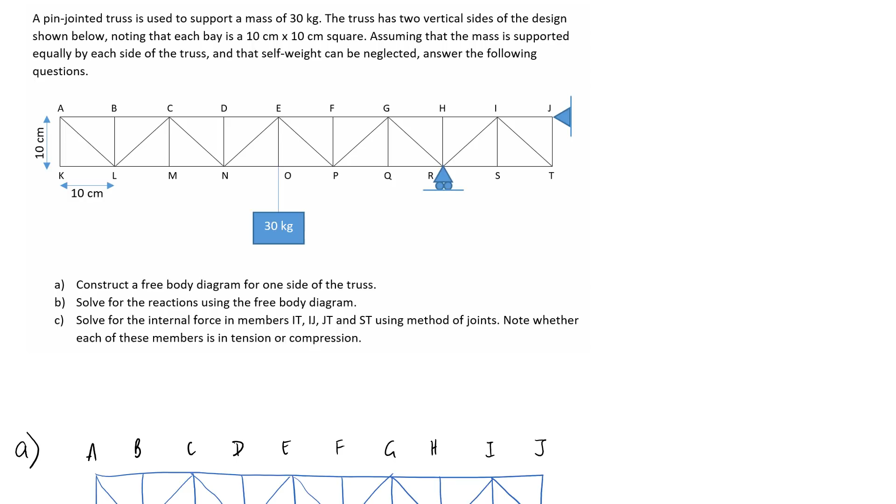So assuming that the mass is supported equally by each side of the truss and that self-weight can be neglected, we need to answer the following questions. So the first one is that we need to construct a free body diagram for one side of the truss. So of course a free body diagram is just a diagram that shows the forces acting on a particular body. So if we scroll down a little bit, I've drawn in the basics of what our body, which is the truss, actually looks like. So onto this we need to add on the forces.

So the most obvious force, I think, is this first one here that I'm going to consider, which comes from the weight that's hanging off the truss. So at the moment, this is given as a mass of 30 kilograms, and that's the total applied to both sides of the truss. So if we're just drawing the free body diagram for one side, then each side's going to take half of that, so 15 kilograms.

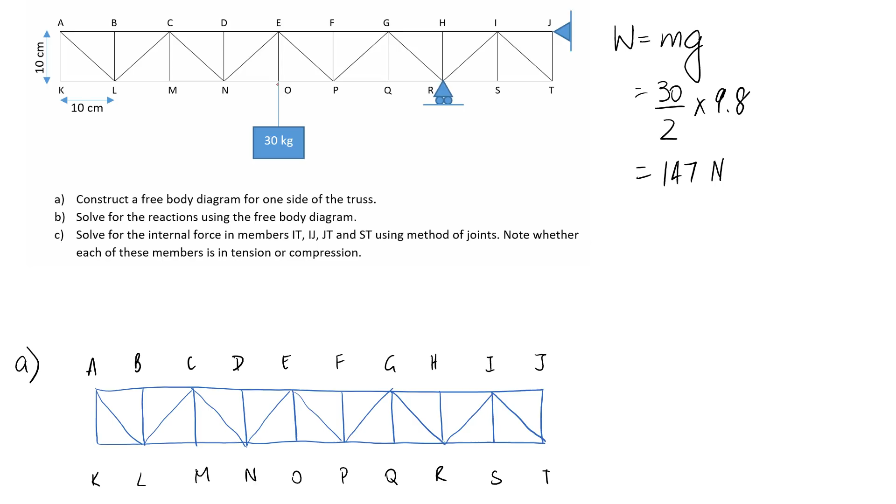Now we can calculate that as a weight using our equation where weight is equal to mass times gravity. So I'm going to write this as 30 divided by 2, multiplied by the 9.8 meters per second squared for acceleration due to gravity. So this ends up working out as 147, and the units are going to be in newtons. So when I mark it on my diagram, it's acting at this point O on my truss, and we know that it's going to be acting downwards because that's the way that gravity operates. So my first force is 147.

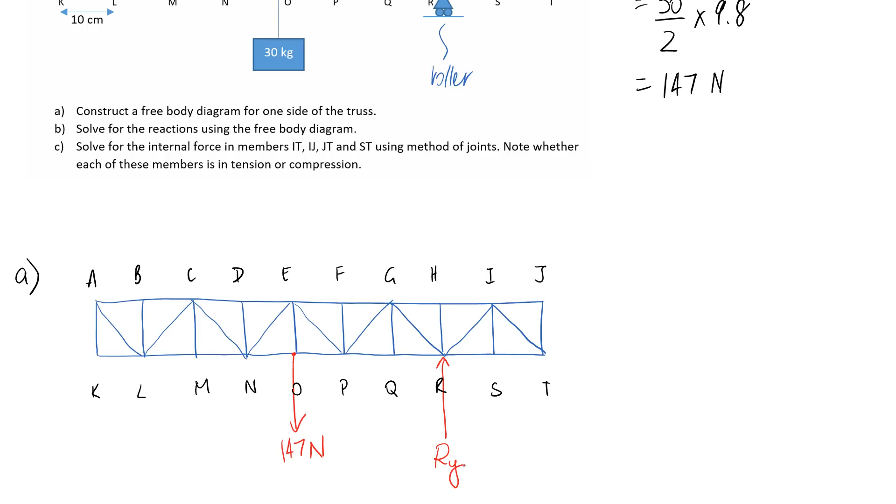Alright, so looking back up here, we're going to get a couple of other forces coming from the supports. So these are the things that are holding our truss up or connecting it to the ground. So let's think about this one first. This is a roller support because it's got the little wheels on it. So we know that roller supports are only going to provide one reaction, and that happens perpendicular to the contacting surface. So we can see the surface here is horizontal, which means that the reaction will be vertical. So I'm going to take a stab as to which direction, as in either upwards or downwards, this is operating in. And it's acting at point R. I'm going to guess it's going up, but we'll see in the calculations whether that was correct. And I'm going to call it RY.

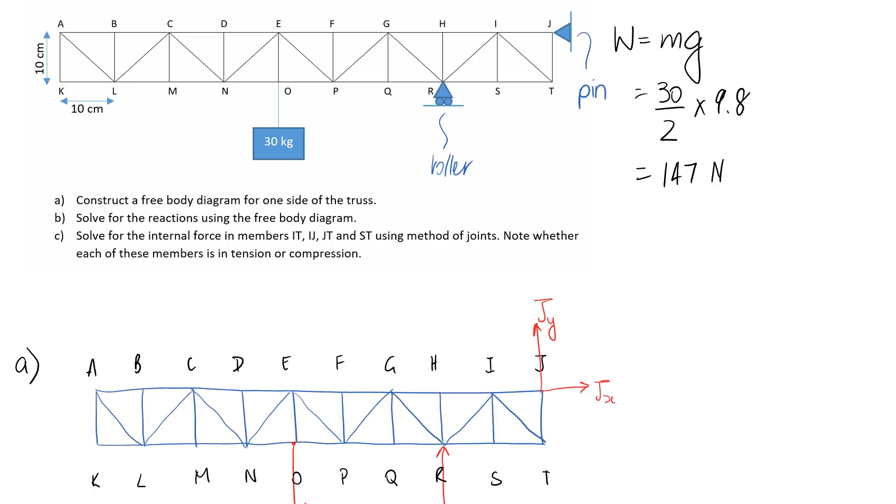So the other support we had here is a pin support. And we know that pins have a horizontal and a vertical reaction that they can provide. So that's over here at point J. I'm going to guess that the horizontal part is going to the right, and I'll guess that the vertical part is going upwards. So I'm calling them JX and JY. That there is pretty much my complete free body diagram, because we're told to neglect the self-weight of our truss. So that means that there's nothing else that's really acting upon it. No wind load we're told about or anything else. So that's part A complete.

So we'll jump on to part B, which is now to solve for the reactions using our free body diagram. So that means we need to figure out RY, JX, and JY. Now, if we're assuming, which we are going to, that our truss is in equilibrium, so it's not moving, we have three equations that we can use. So sum of forces in the x direction has to be 0, sum of forces in the y direction has to be 0, and sum of moments at any point that you pick have to be equal to 0. So we have three equations and we have three unknowns, which means we should be able to solve all of them.

So I'm going to start off by selecting the sum of moments equation, and we need to pick a point to consider this about, and I'm going to pick point J, which was where the pin joint sat. So the reason is, if I pick that point, JY and JX are not going to appear in the equation, so I should only end up with one unknown, which is RY, which I can solve directly. If I pick another point, what typically will happen is I will end up with more than one unknown in the equation, and then I'll have to use simultaneous equations and substitution to be able to figure them all out. So I'm going to start with summing moments at the pin joint.

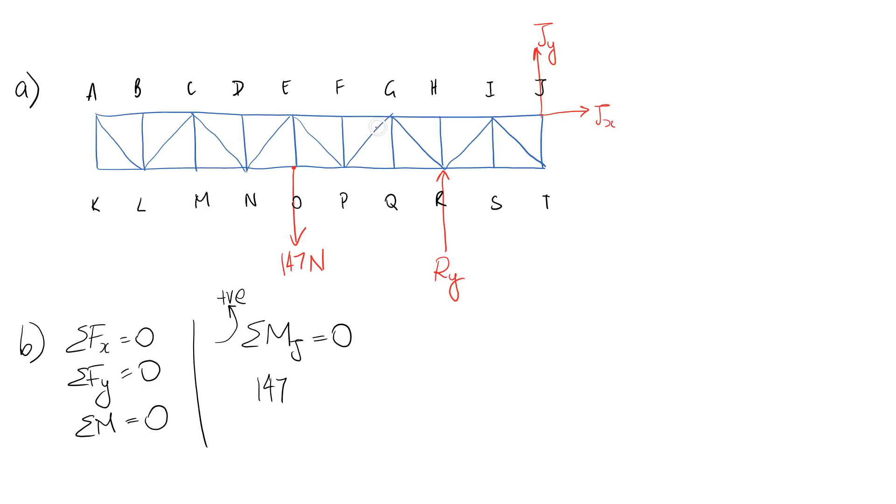So in this case, my line of action operates straight through this point E, and the perpendicular distance is going to align with the length of the top of the truss here. So I can see that this is going to include 1, 2, 3, 4, 5 bays, and we were told back up here that each bay was 10 centimeters. So that means there's going to be 50 centimeters in terms of the distance from the line of action back to our point of interest. I'm going to do it in meters, our base units, so I'll mark it in as the equivalent of 0.5 meters.

So down here, to calculate my moment, it's the force multiplied by that distance, and then the last thing I need to think about is the direction that it's going to push around our point of interest. So this force looks like it's going to try and rotate our truss in an anti-clockwise direction about point J, and we're saying anti-clockwise is the positive direction, so it goes positive into the equation.

Alright, so let's consider the next force, which is Ry. So that's its size. We need to solve for that in a moment. We now need to multiply it by the distance from its line of action all the way back to the point of interest. We can see that that's 2 bays, which is 20 centimeters or 0.2 in meters, so that we get base units out. So I'm going to pop that in here. And then thinking about the direction, this is going to try and rotate us in the clockwise direction about point J, so it's going to go in as a negative.

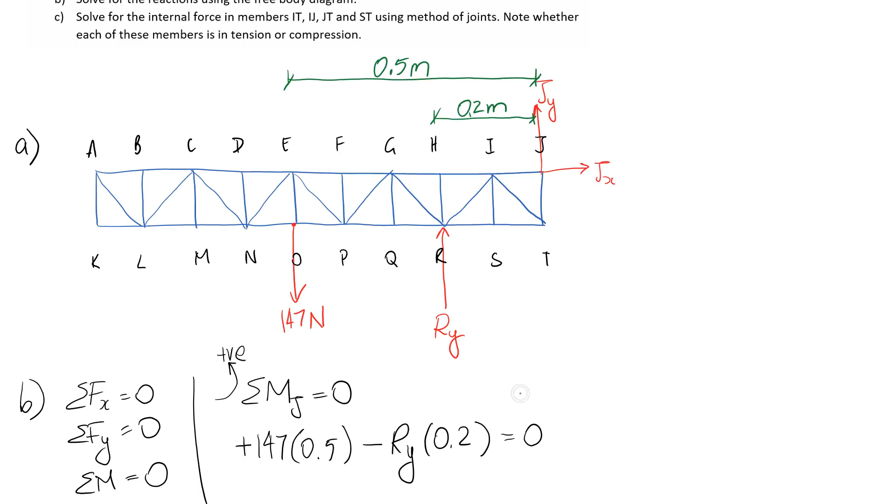Oh, and I should have mentioned, we've got 2 other forces on this diagram, but both of them are acting directly through point J. So that means that their distance back to our point of interest is going to be 0. So you could, if you wanted, put in here Jy times 0 plus Jx times 0, but you can see that they're going to just drop out.

All right, so now I should be able to rearrange directly for Ry. So I'm going to leave the 147 and the 0.5 on the left, and I'm going to shift this to the right-hand side, which means that the sign is going to switch over. So it goes from negative to positive. And then if I want Ry on its own, I'm going to need to divide by 0.2. So 147 times 0.5 divided by 0.2 is going to give me the answer for this reaction force. And it comes to 367.5, and the units are going to be newtons since we did everything in base.

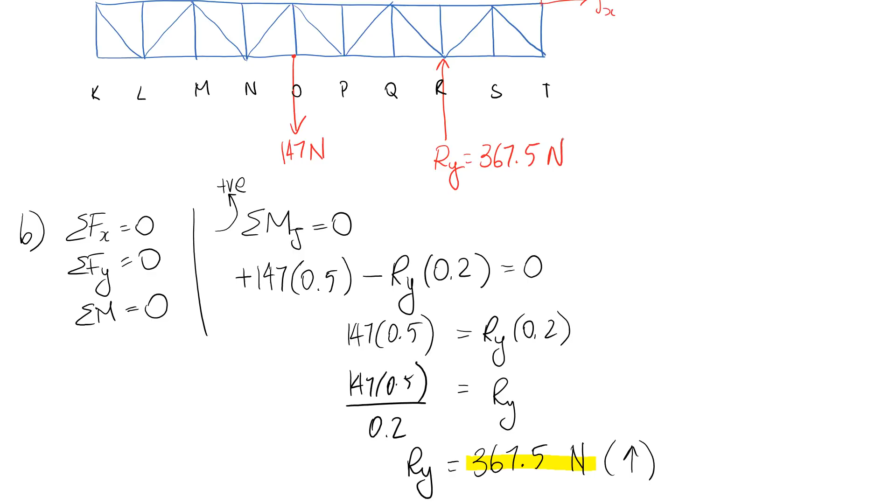So I'm going to highlight that. And I should mention as well, it's come out positive, which means that we had the direction correct up here on the diagram. So we initially guessed that it was going upwards. So I'll mark that over here. We were correct in that it was going up. So this is 367.5.

All right, so we have 2 other forces that we need to figure out, and we have 2 other equations that we can draw upon. So I might go next with sum of forces in the x direction has to be equal to 0. So if we look at our diagram, the only thing that's happening in the x direction is Jx. We don't have any other applied forces going in this direction. So this one's pretty easy. If we substitute in, we're going to get Jx must be equal to 0 in order for the forces to be balanced in that direction. So I'll pop in here, that one solved for.

And then the last one we're going to get from our last equation, which is sum of forces in the y direction has to be 0. So we do have a few things happening in that direction, so let's substitute them in. So 147 is going downwards, so I'm going to put it in as negative. We've got this 367.5 going upwards, so it's going in as positive. And then I've got Jy going upwards, so I'm going to put it in as positive as well. So we need to rearrange this for Jy on its own. So I'm going to flick both of these terms to the other side, remembering that that means the signs are going to change over. So if we put 147 minus 367.5 in a calculator, this comes to negative 220.5.

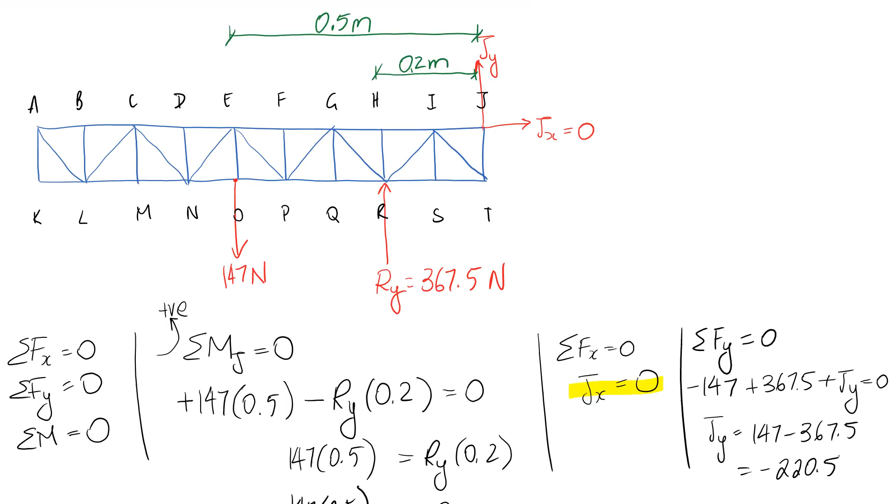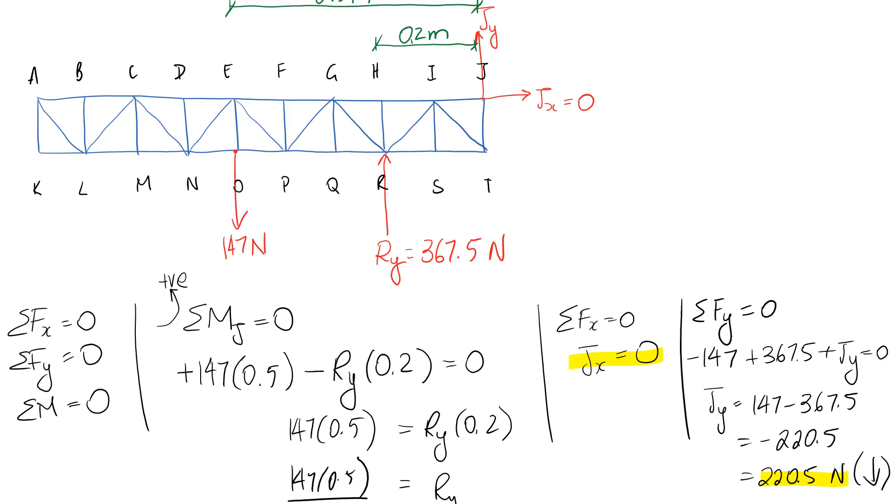So it's come out as a negative value, which tells us that we guessed the direction incorrectly. So we guessed that Jy was going up initially, but what this is telling us is that it's going to actually be 220.5 newtons going the other way, which is downwards. So that would be our answer for this last reaction force. So I'm going to make sure that it's correct up here on my diagram. So this is our conclusion for it.

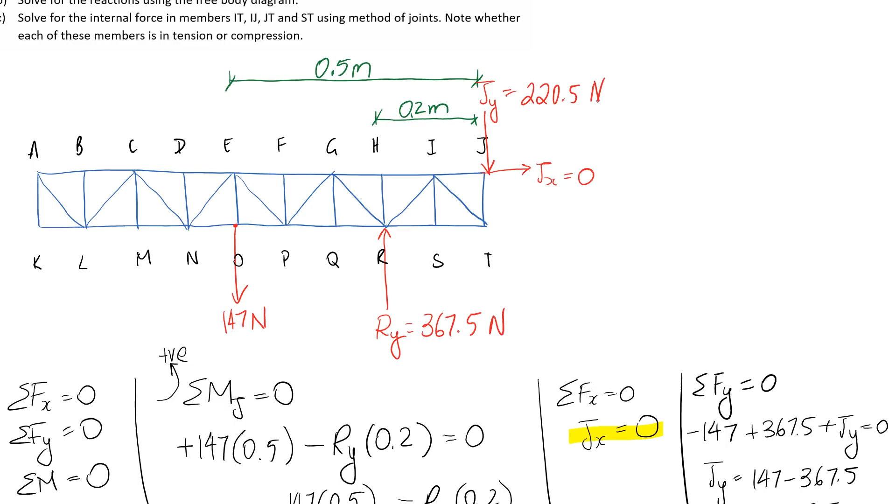I'll just try and erase our line here and now draw it downwards onto that joint. It's a bit messy. And yeah, I'll pop it in. So we said it was 220.5. So that there is our 3 reactions, which is the answer we were looking for in part B of our question.

So part C, which is going to be looking at solving the internal forces in a few different members, I'm going to do in a second video. I'll separate it out. So please look at that for the following part.